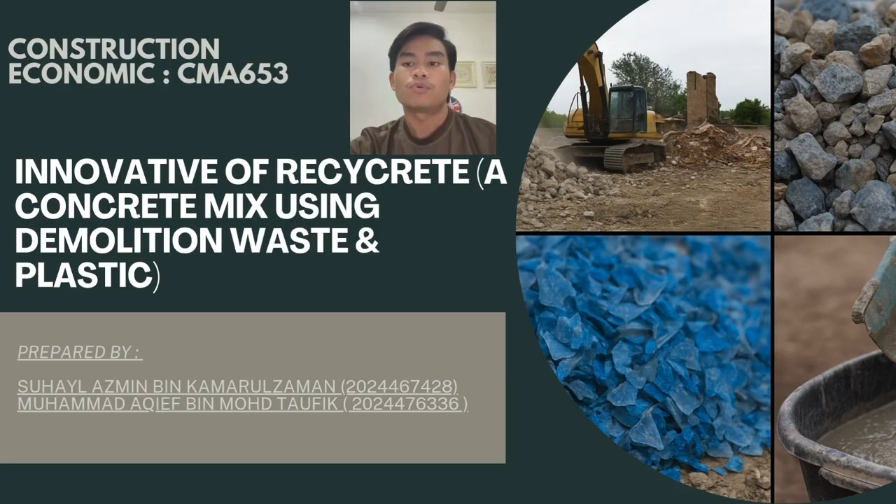We are here today to present our innovation project titled Recycrete. This is a sustainable concrete mix designed by us using recycled demolition waste and plastic materials. Our project supports the principles of a circular economy with the aim to reduce waste and promote greener building solutions in Malaysia.

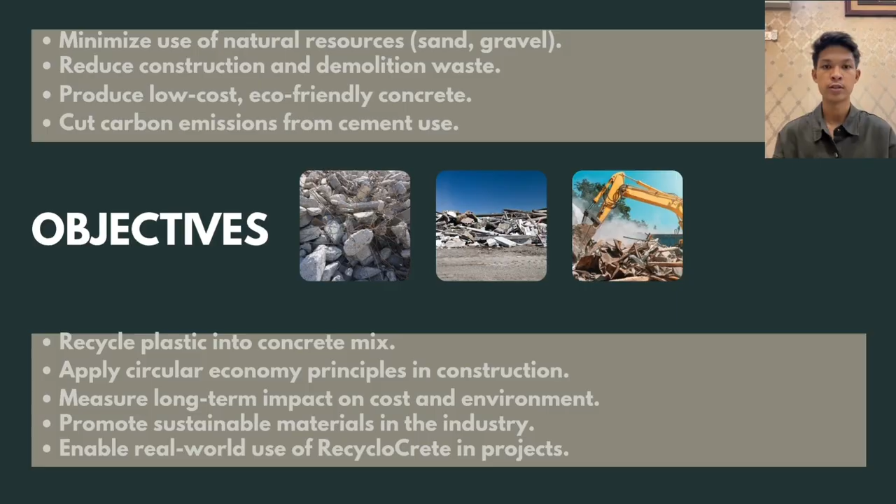Before we go further, let's briefly share the main objectives behind our innovation. First, we aim to reduce construction and demolition waste by repurposing old materials. At the same time, we want to reduce the need for virgin resources like sand and gravel. We are also trying to tackle plastic waste by using shredded plastic as part of the concrete mix.

Another key goal is to produce a low-cost, eco-friendly concrete option for the market. In doing so, we want to support circular economy practices in the Malaysian construction sector, while reducing carbon emissions from cement use. We also hope to promote greater awareness and adoption of sustainable materials, especially in real projects. Of course, we will be measuring our long-term sustainability impact from cost saving to carbon reduction.

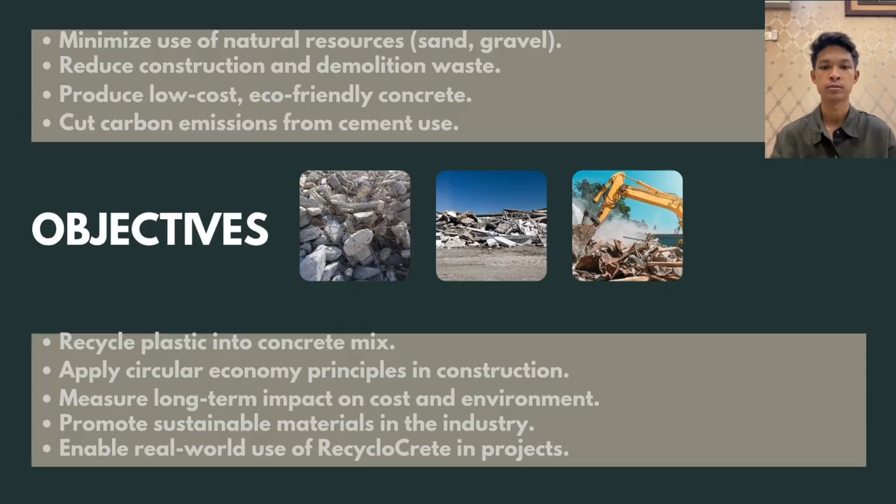Okay, so for the circular economy in Malaysia, for our research, Malaysia's construction sector contributes between 3 to 5% of the national GDP, but it also generates a huge amount of waste. Based on the current practices, a large proportion of construction waste ends up in landfills, often without being reused or recycled. Besides that, we are facing a plastic crisis. Tons of single-use plastics are being dumped or incinerated every day.

Meanwhile, traditional concrete production relies heavily on natural resources and emits a high amount of CO2, especially from cement manufacturing. We studied how other countries are handling these challenges using circular economy models by designing for disassembly, reusing demolition waste, and incorporating recycled plastic into building materials. This inspired our idea.

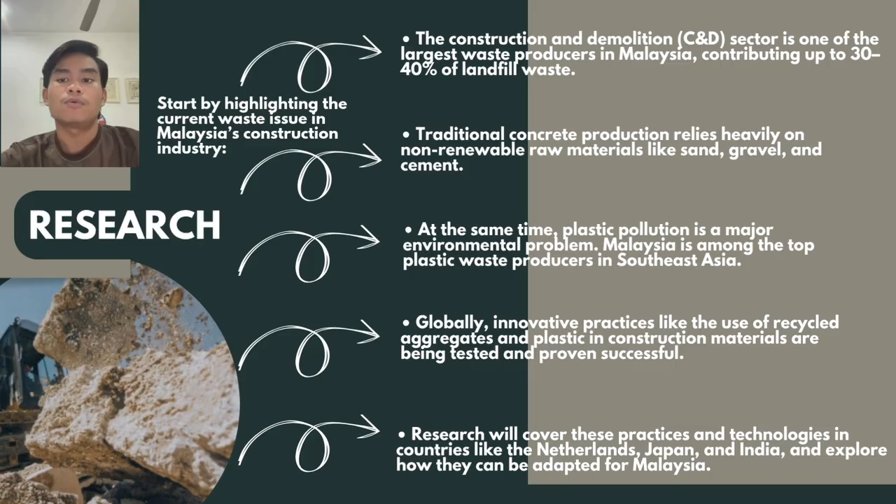Next, I will explain about problem identification. From our research, we identified several major issues in the Malaysian construction industry. First, the over-dependence on virgin aggregates like river sand and gravel is unsustainable. Second, construction and demolition waste is piling up with very limited recycling initiative.

Plastic waste is another issue. Despite various awareness campaigns, the actual rate of plastic reuse in construction is still very low. And, of course, the cement industry alone is a major carbon emitter. So, the current practices are not only costly in the long run, they are also harmful to the environment.

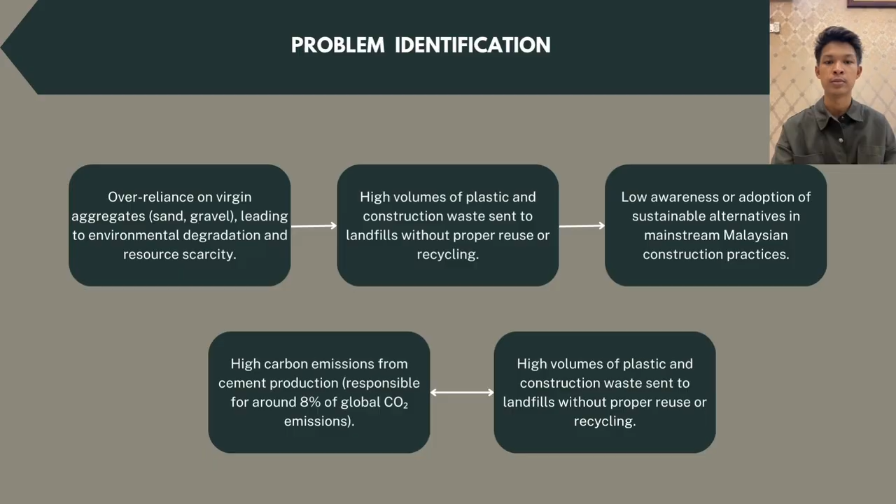Next is innovation development. To address this issue, we developed Recycrete. It is a concrete mix that replaces part of the natural aggregates with recycled material from demolition sites. We also include shredded plastic like PET bottles as a partial replacement for sand, and instead of 100% cement, we mix in fly ash, which is a byproduct from coal plants. This helps reduce carbon emission during production.

Recycrete is not just an idea, it is a practical material suitable for pavement, drains, sidewalks, and even low-rise building elements. It is cost-effective, environment-friendly, and scalable.

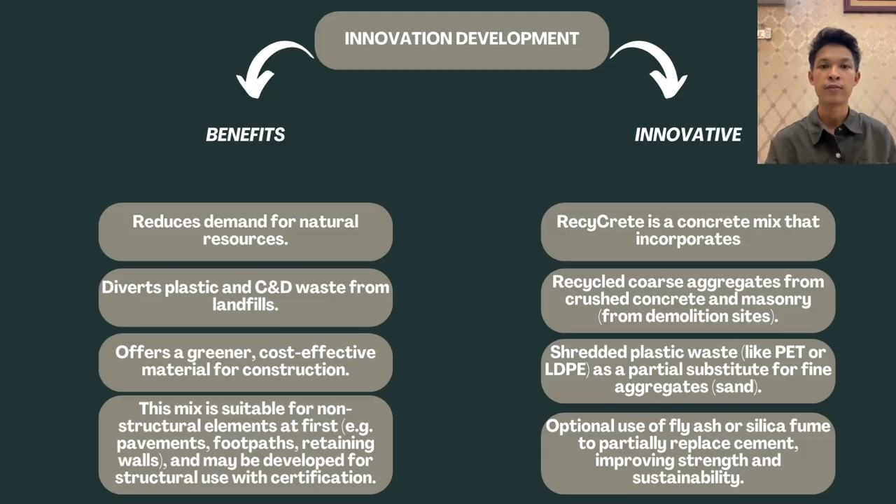Okay, so the next one is the implementation strategy. To implement Recycrete, we propose a few key steps. First, we partner with demolition contractors to collect usable rubble. Then, we process this rubble using mobile crushers to create recycled aggregates. At the same time, we collaborate with local recycling centers to obtain clean, shredded plastic waste. These materials are then mixed at a batching plant using adjusted ratios.

So our first target will be municipal projects like park walkways or bus stops, where we can test the product in a safe and controlled environment with proper certification from bodies like CREAM and CIDB, so we can scale to larger infrastructure.

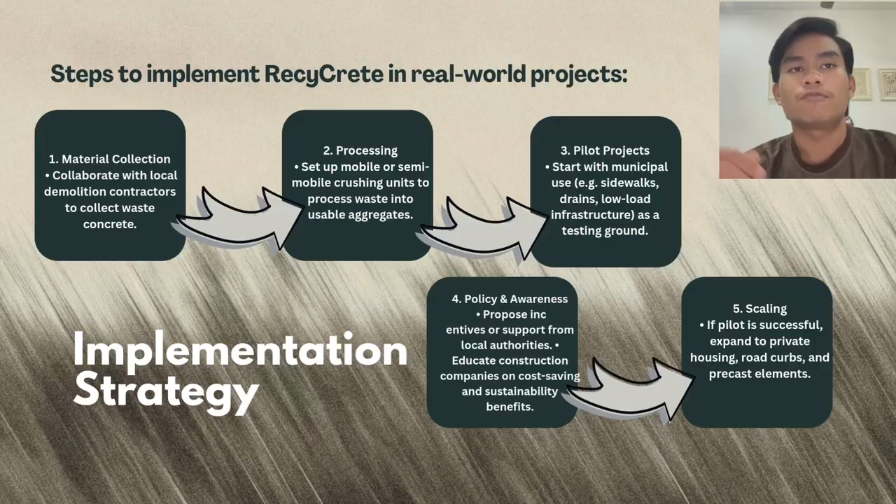Okay, so for the cost-benefit analysis, when comparing Recycrete to traditional concrete, there are several advantages. The cost of raw materials goes down because we are using waste materials. We also save on waste disposal costs. For example, rather than paying to send the waste to landfill, we repurpose it. We estimate that overall cost could be reduced by 15 to 25% depending on the project size.

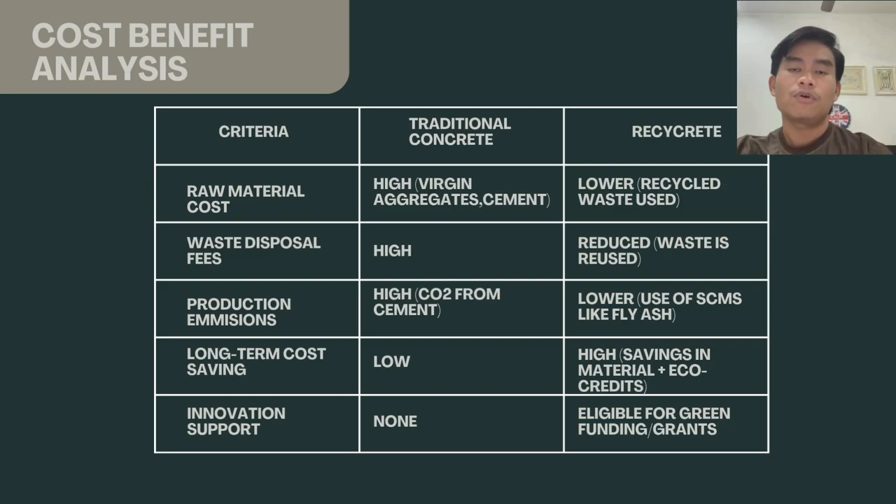In addition, with carbon tax policies becoming more common globally, using sustainable materials could offer future tax incentives or green certifications. Next is sustainability impact. Recycrete brings significant environmental benefit. It reduces the volume of construction and plastic waste going to landfills. It also cuts down the use of non-renewable materials and lowers CO2 emission from cement production.

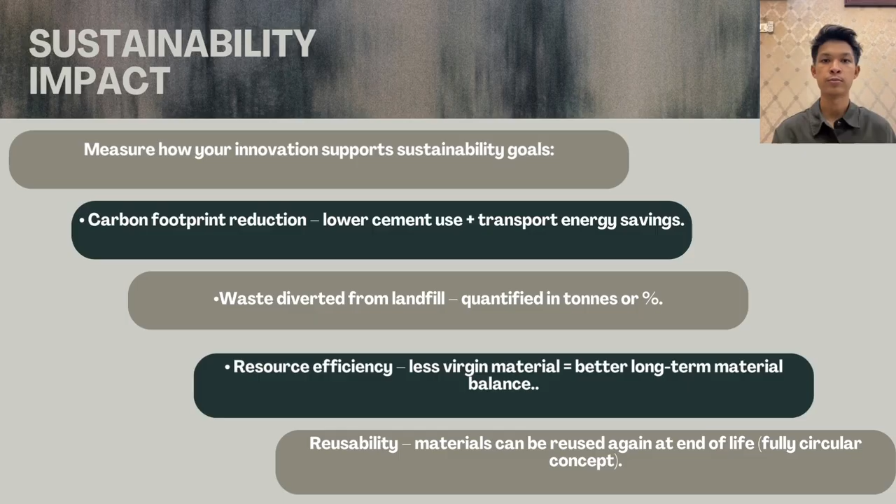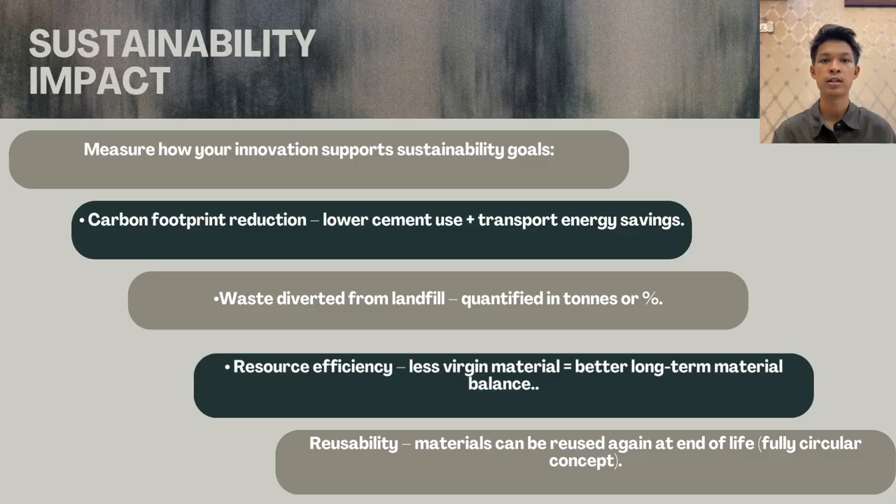From a global perspective, this project supports SDG 9 by promoting industry innovation, SDG 11 by supporting sustainable cities, and SDG 12 through responsible consumption and waste reduction. This innovation is not just good for the environment, it also creates a cleaner, more responsible future for the Malaysian construction industry.

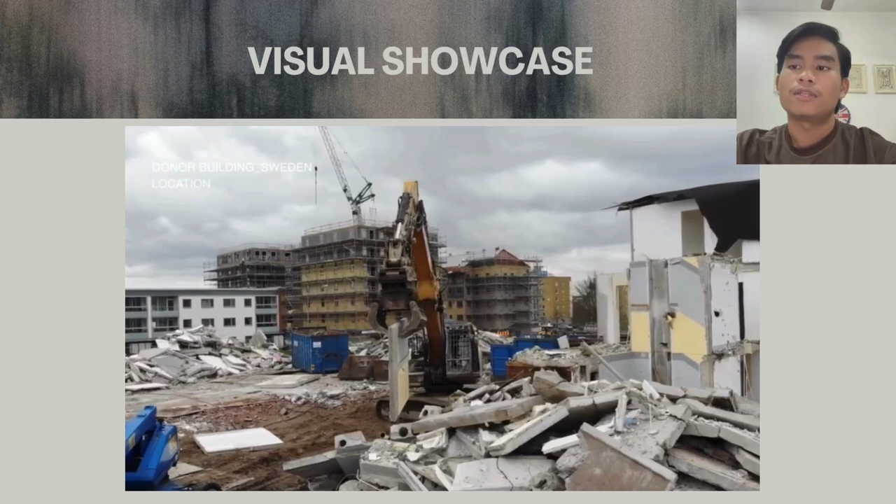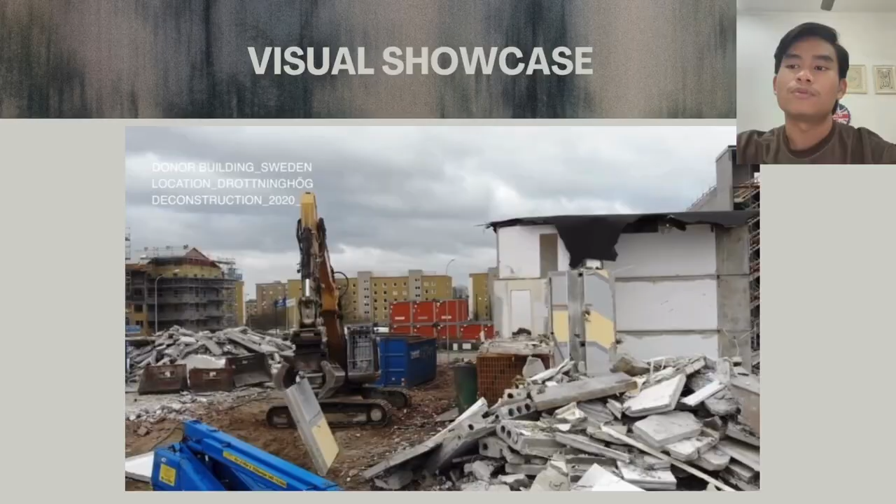Okay, so this is the visual showcase. This is how Recycrete works. First, the concrete waste is crushed into usable aggregates. Then, plastic waste is cleaned and shredded. All materials are mixed in proper proportions along with the cement and fly ash. So the final product is durable, clean, and meets the structural needs for low load applications.

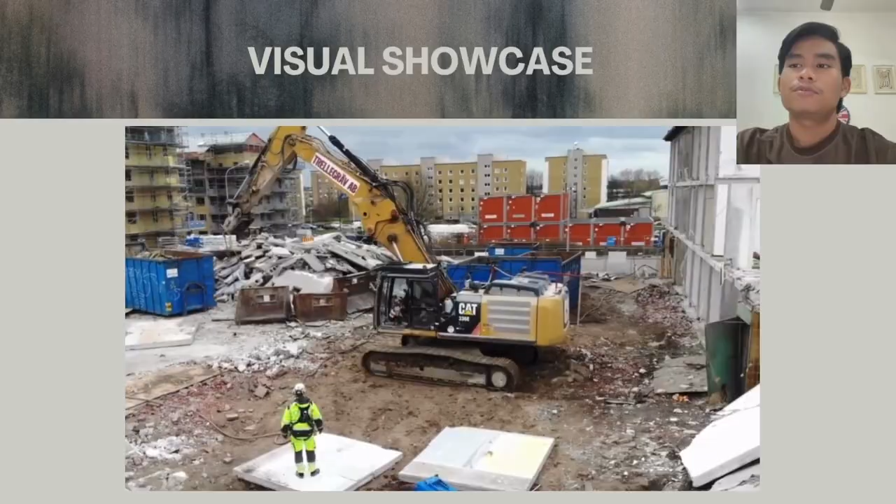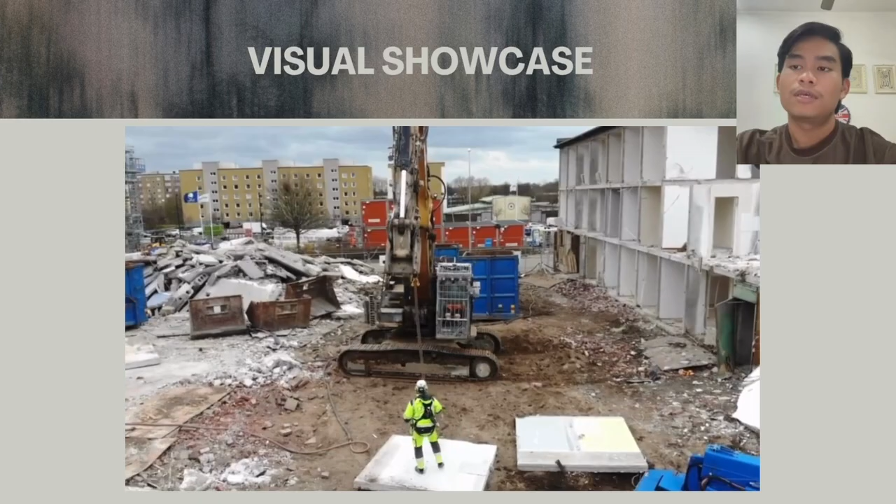Okay, so for the conclusion or the closing remarks, Recycrete is our contribution to a more circular, eco-conscious construction industry. It's practical, affordable, and sustainable. So we believe that by rethinking how we treat waste and turning it into something valuable, we can transform the way Malaysia builds its future.